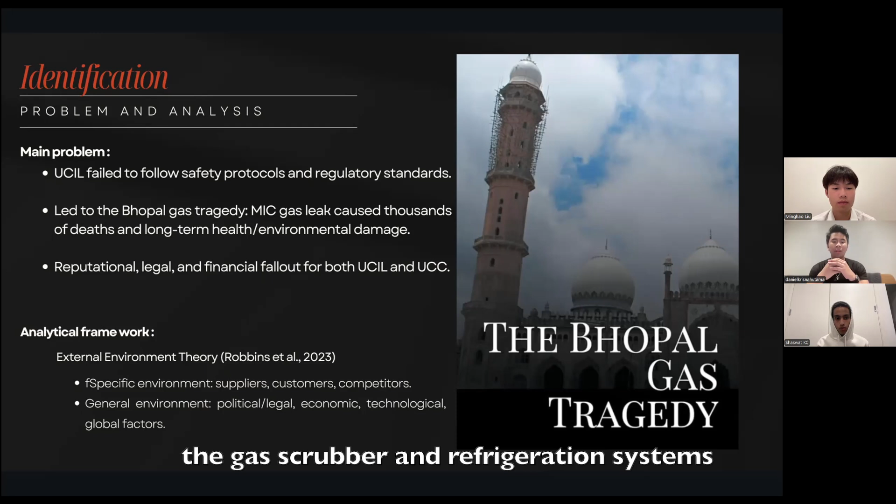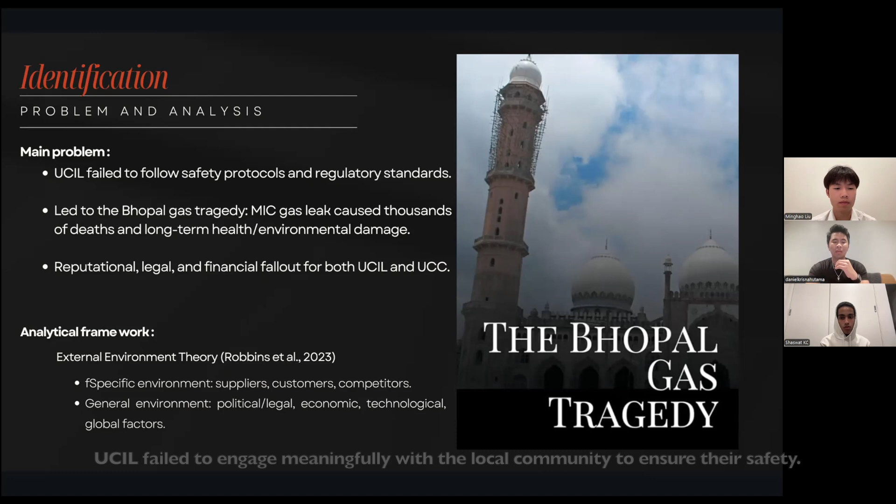Let's start by looking at the core problems UCIL faced. The Bhopal disaster was one of the most devastating industrial accidents in history. At the center of it was UCIL's failure to uphold critical safety standards. The company stored hazardous chemicals such as methyl isocyanate, or MIC, without maintaining necessary precautions. Critical safety infrastructure like the gas scrubber and refrigeration system were found to be non-functional. Additionally, UCIL failed to engage meaningfully with the local community to ensure their safety. These failures led to the uncontrolled release of toxic gas, resulting in thousands of deaths and long-term health consequences for the local population, not to mention a massive blow to UCIL's global reputation.

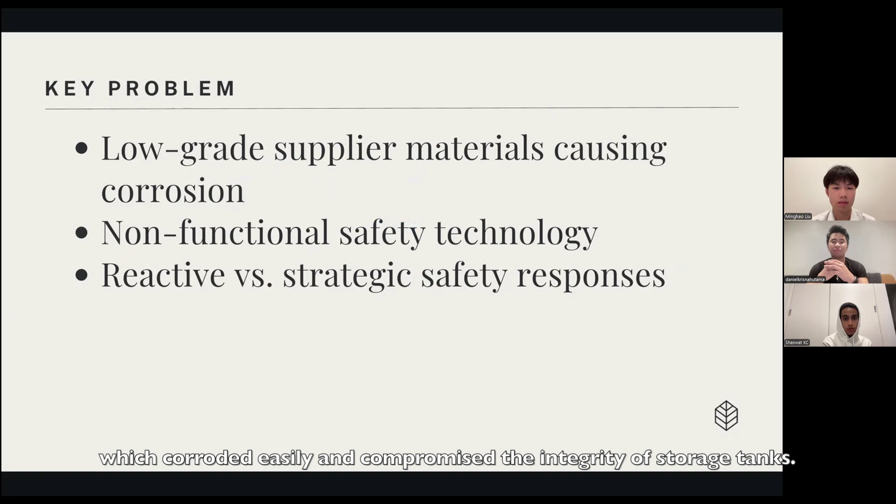There are two central issues contributing to UCIL's crisis. First, the company used low-grade materials from suppliers, which corroded easily and compromised the integrity of storage tanks. Second, there was a clear absence of modern safety technology that could have detected and contained chemical leaks. Instead of taking a proactive approach to these risks, UCIL responded reactively, addressing problems only after they had already caused damage. These weaknesses reflect a broader failure in managing the company's external environment.

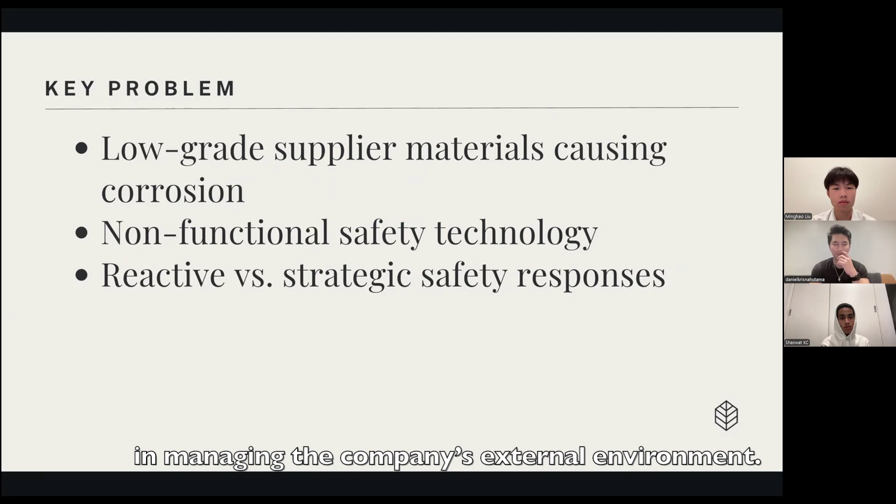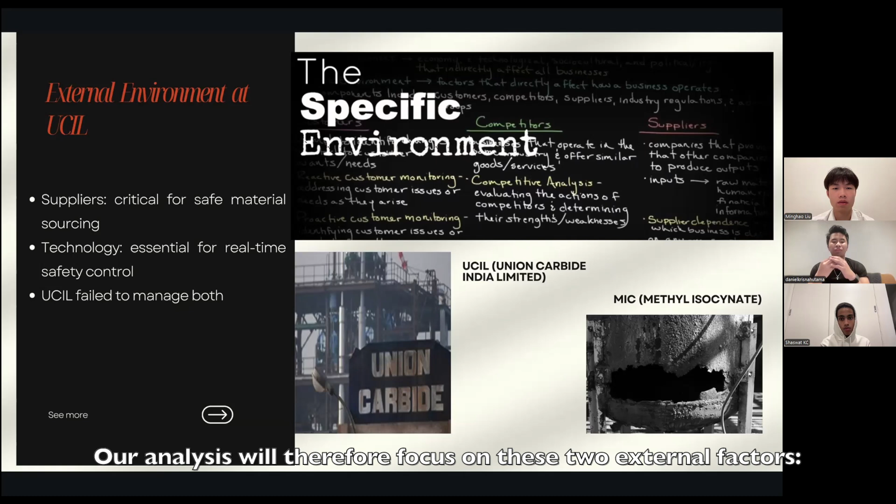According to the management theories by Robbins, Bergman, and Polzer, organizations must adapt to their external environment to survive and thrive. In UCIL's case, two key elements of this environment, suppliers and technology, were critically mismanaged. These components are not just operational details but represent ongoing external pressures that must be consistently assessed and adapted to. Our analysis will therefore focus on these two external factors: the supplier environment and the technology environment.

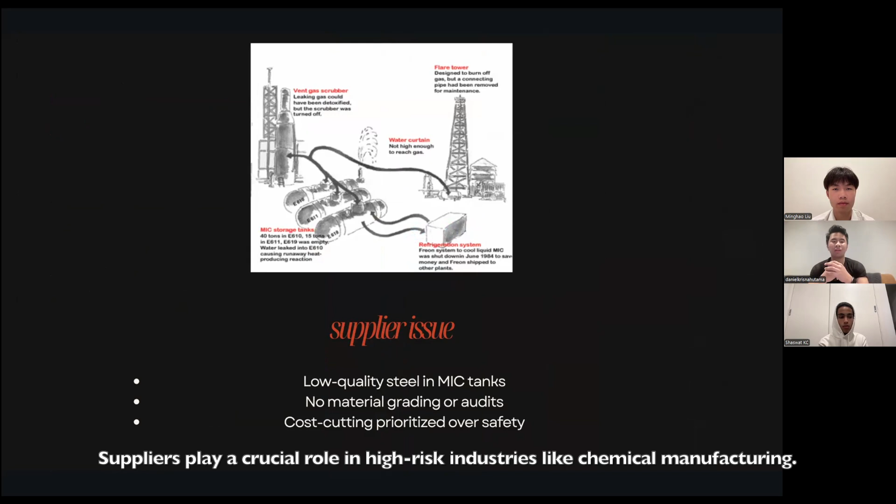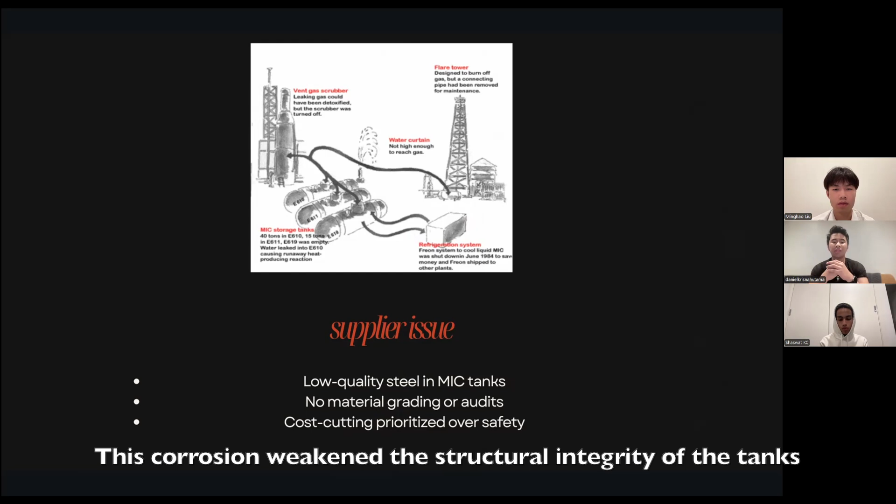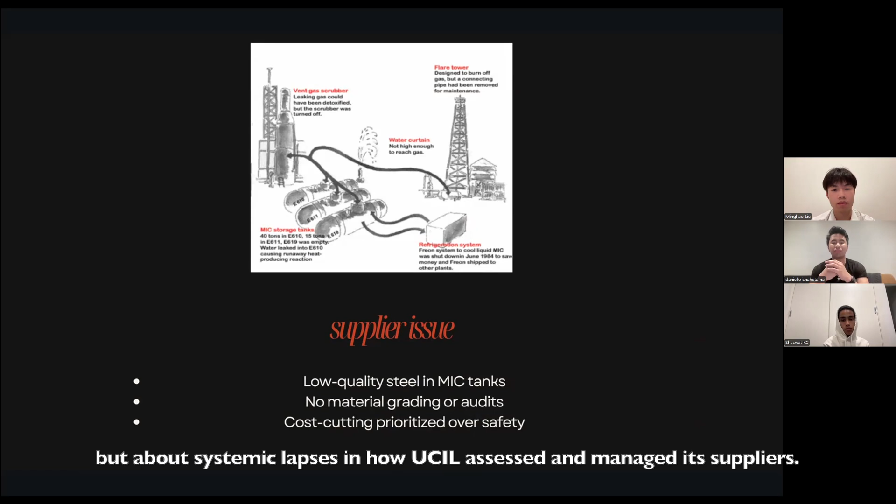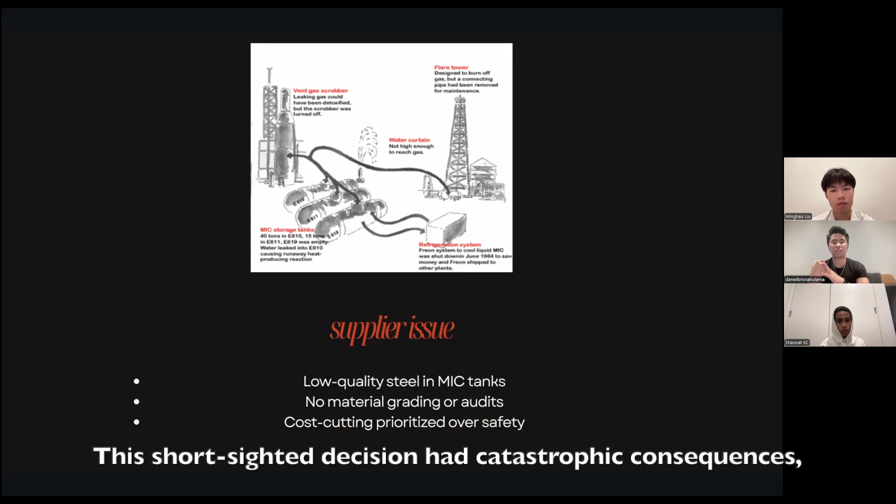Suppliers play a crucial role in high-risk industries like chemical manufacturing. At the Bhopal plant, MIC tanks were constructed using poor quality steel that corroded rapidly. This corrosion weakened the structural integrity of the tanks and contributed to the leak. The issue wasn't just about the materials, but about systemic lapses in how UCIL assessed and managed its suppliers. The company had no formal protocols for material inspections or vendor evaluations, and chose to prioritize cost saving over quality. These short-sighted decisions had catastrophic consequences, both operationally and ethically.

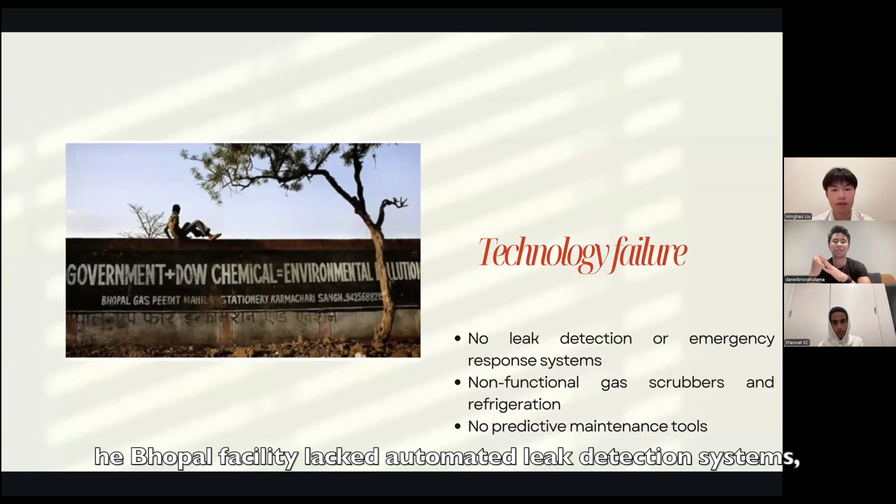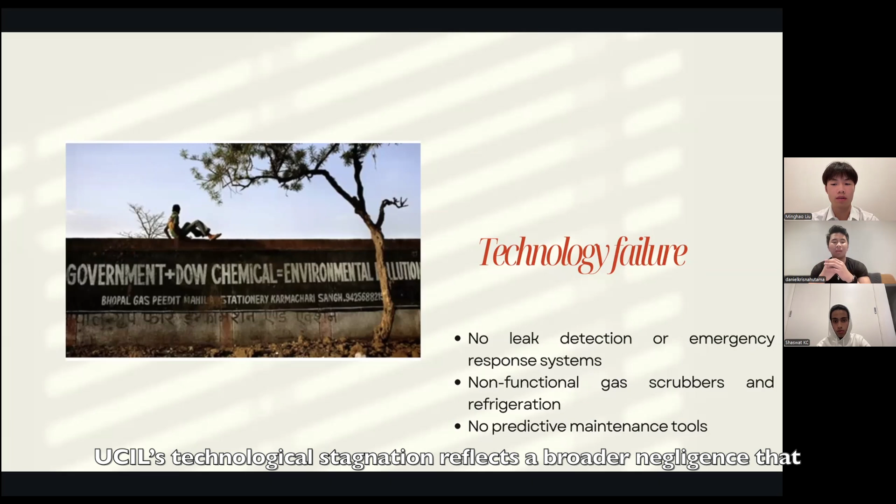The second major failure was in the technological environment. Unlike UCC plants in developed countries like the United States and Canada, the Bhopal facility lacked automated leak detection systems, emergency response protocols, and real-time monitoring tools. Essential systems like the gas scrubber and refrigeration unit were shut down or malfunctioning. In modern manufacturing, especially where dangerous chemicals are involved, predictive technology is essential to prevent disaster. UCIL's technological deficiencies reflect a broader negligence that made it impossible to manage risk in real time.

Supplier Quality and Compliance Program. Our first recommendation addresses the supplier-related failures at UCIL. We propose the implementation of a comprehensive supplier quality and compliance program. This program aims to ensure that all materials used, especially those in contact with hazardous chemicals like MIC, meet global safety and quality standards. The program would involve three major components.

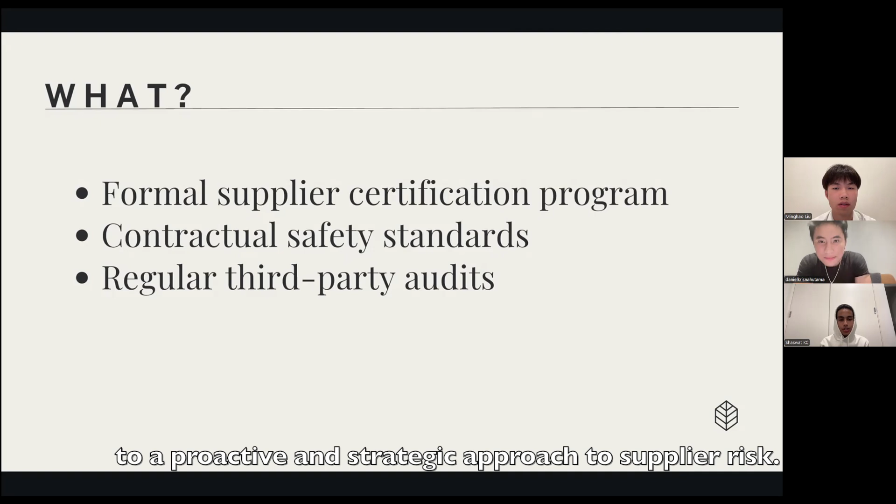First, vendor certification, where all suppliers must pass a quality assurance process to continue working with UCIL. Second, all contracts must include safety-based terms that hold vendors accountable for supplying substandard materials. And finally, regular third-party audits will be conducted to ensure ongoing compliance. This system will help UCIL shift from a reactive model to a more proactive and strategic approach in reducing supply risks.

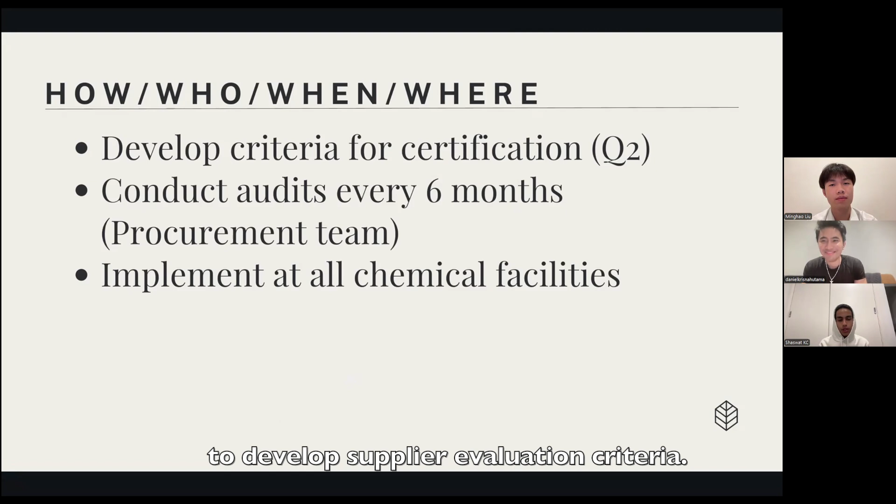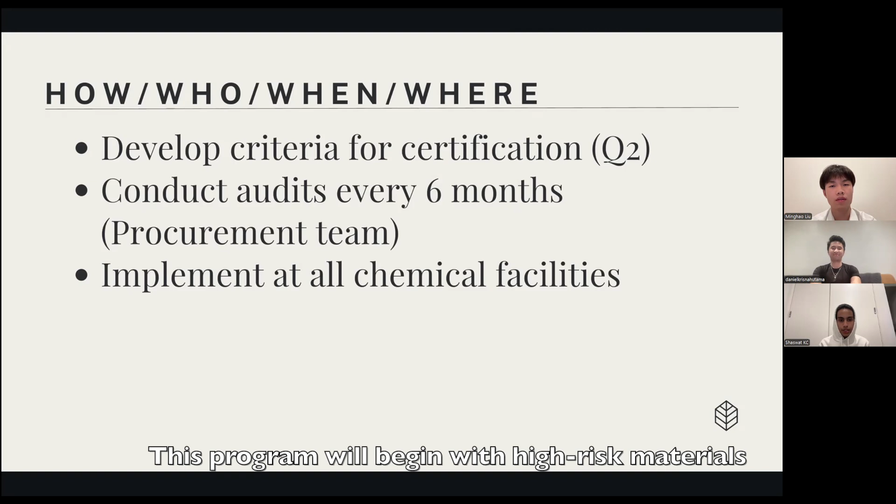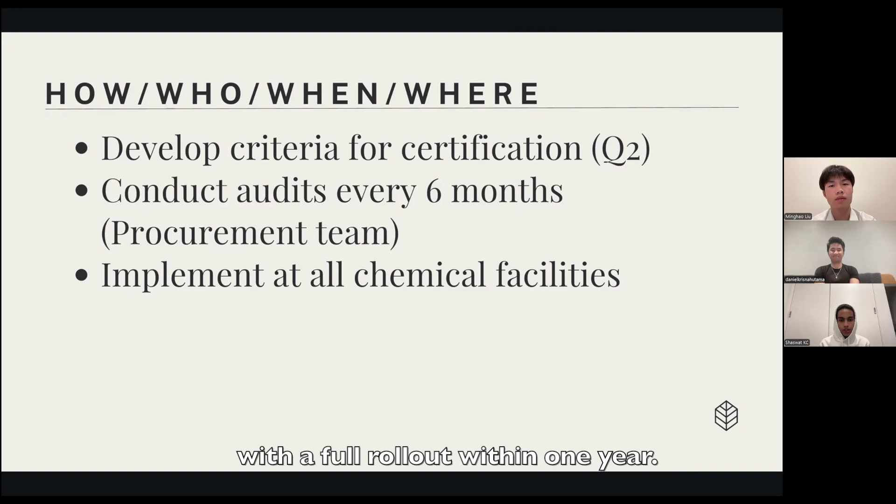To implement this program, UCIL's procurement and quality assurance teams will work together to develop supplier evaluation criteria. Certified third-party auditors will be hired to conduct biannual inspections. This program will begin with high-risk materials and gradually expand to all suppliers. Implementation is proposed to start in the next fiscal quarter with a full rollout within one year. All UCIL facilities, not just Bhopal, will be included to standardize safety across the company.

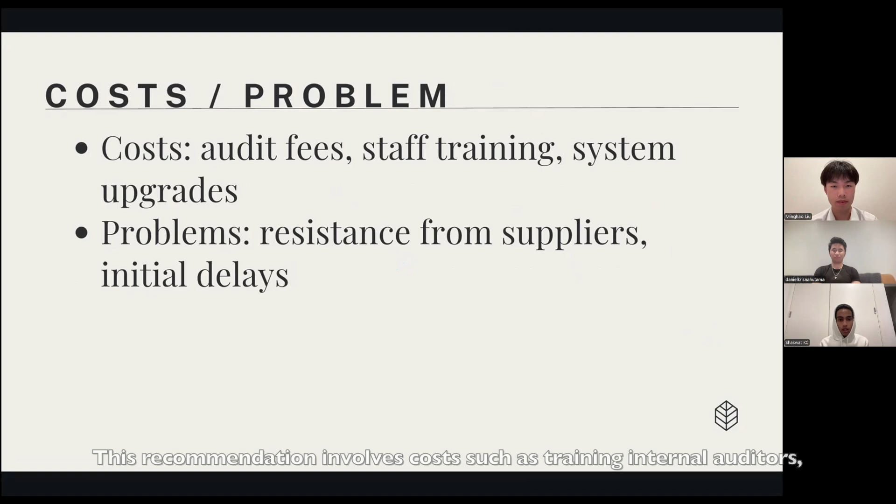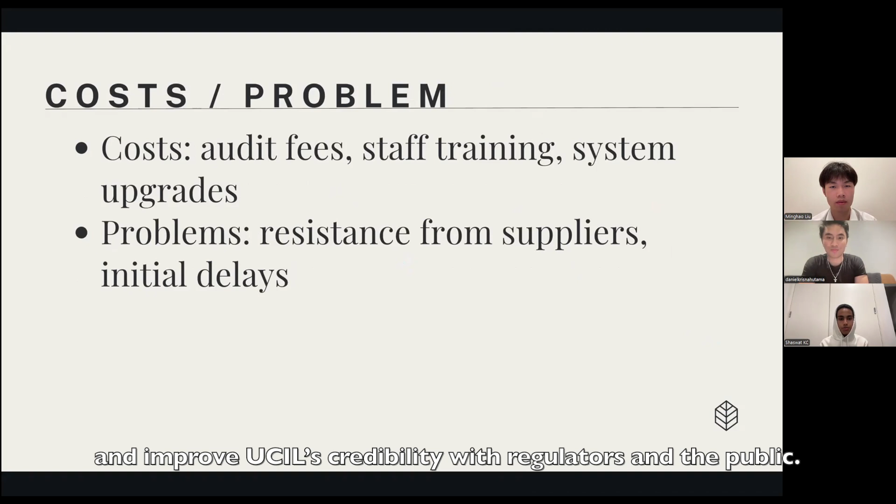This recommendation involves costs such as training internal auditors, hiring third-party services, and system integration. There may also be resistance from existing suppliers who are unable to meet the new standards. However, over time, this program will reduce the risk of supplier-related failures and improve UCIL's credibility with regulators and the public. It's a necessary investment to rebuild trust and ensure long-term operational resilience for UCIL.

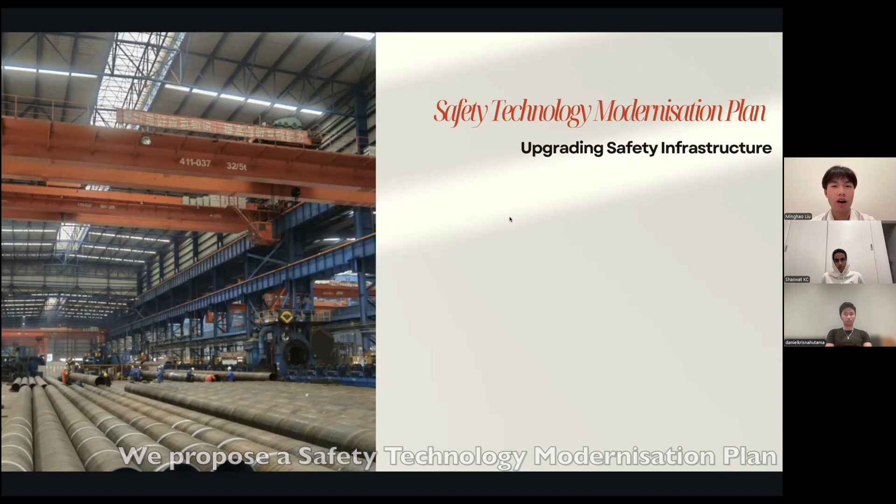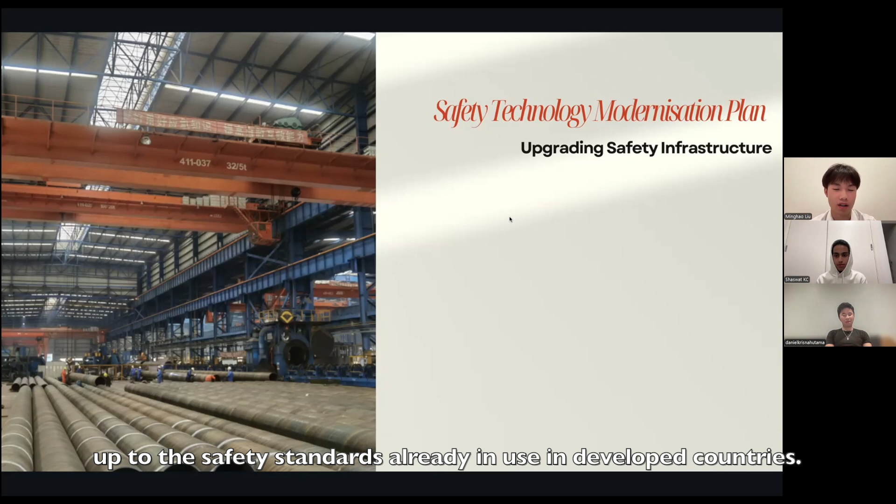Our second recommendation focuses on the lack of modern safety systems at UCIL. We propose a safety technology modernization plan that aims to bring the Bhopal plant and all other UCIL plants up to the safety standards already in use in developed countries. The plan includes installing infrared gas detectors, automatic shut-off valves, and maintenance software that can identify system failures or corrosion. We also propose real-time dashboards that track hazard levels across different units. This technology is widely used in chemical industries globally, and it is crucial for UCIL to adopt it to avoid another disaster.

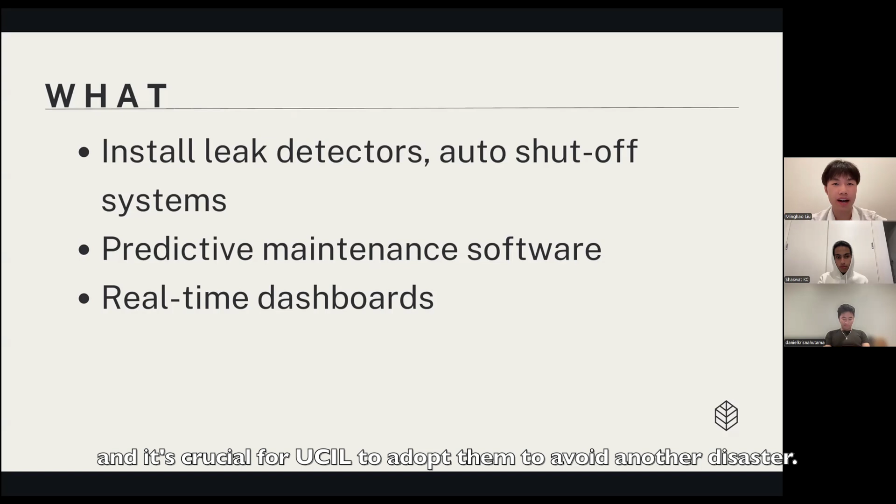The engineering teams will oversee installation of hardware such as gas sensors and pressure monitors. This will be integrated into the company's control systems and maintained using predictive software. Staff and first responders will undergo intensive training on the new technology, and emergency drills will be conducted quarterly. This initiative will begin within 3 months and will initially focus on high-risk units like MIC storage areas, then expand to the rest of the facilities.

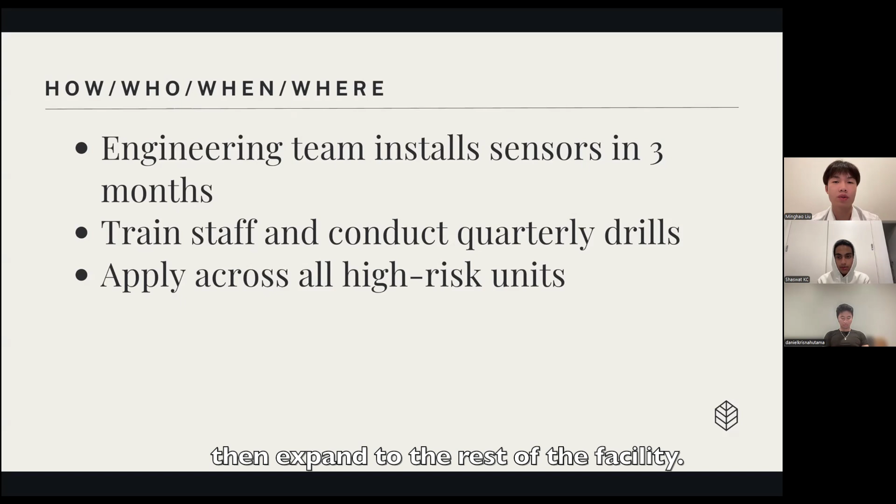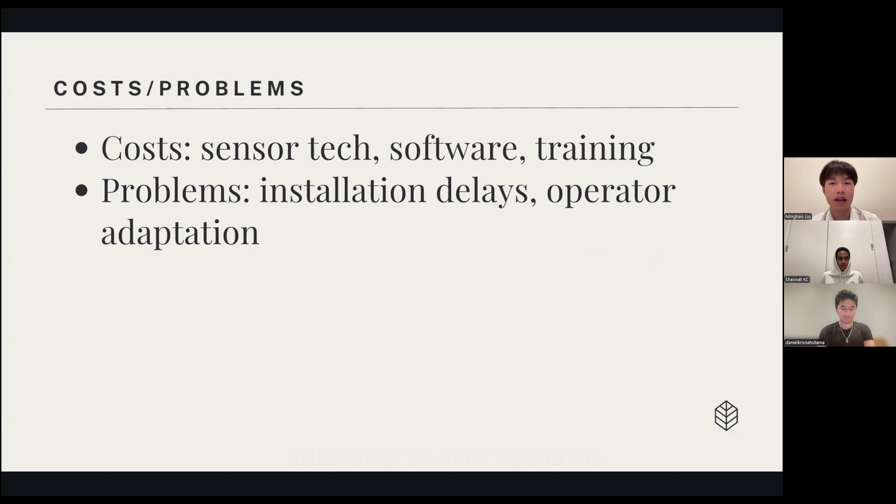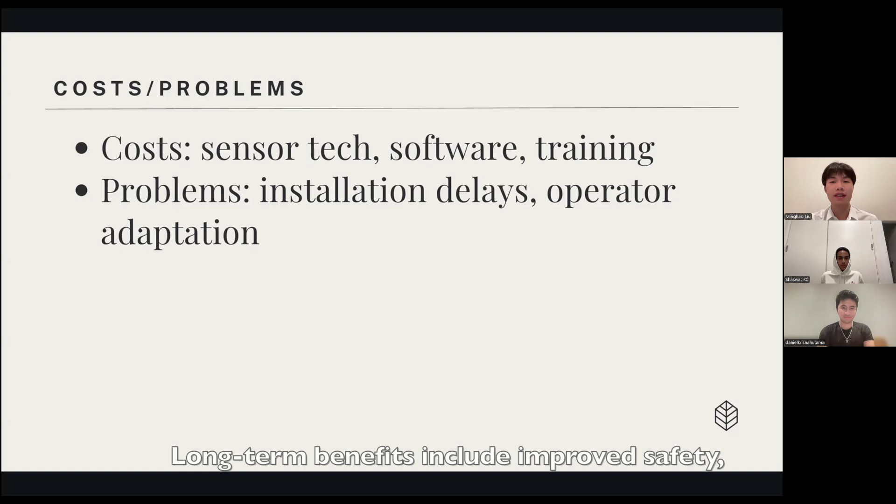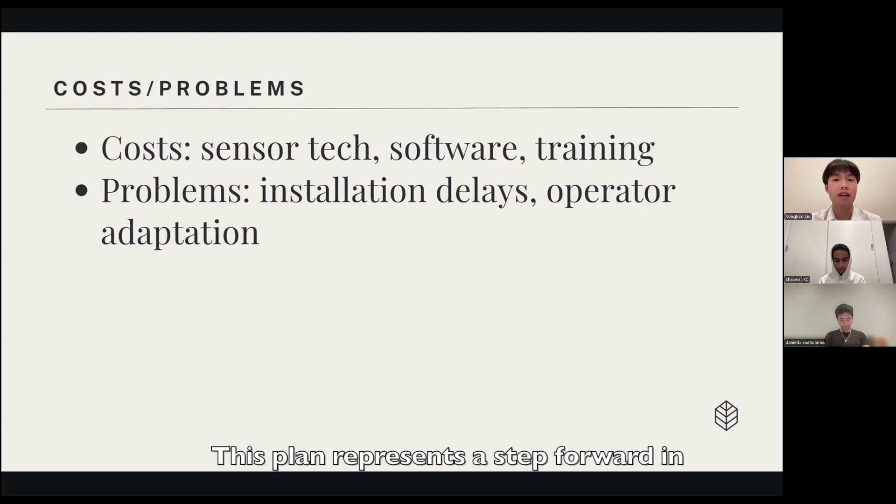Costs will include purchasing technology, hiring technical staff, and training authorities. The major challenge is the learning curve involved in adapting to a new system. However, the cost of not acting is far greater, both in terms of human life and reputation damage. Long-term benefits include improved safety, better compliance, and restored stakeholder trust. This plan represents a step forward in aligning UCIL with global best practice.